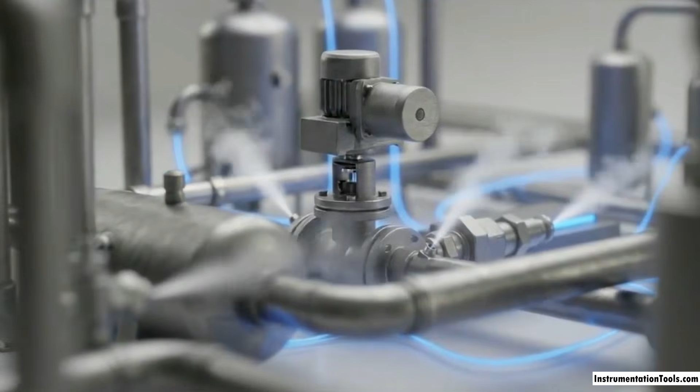Imagine walking into a facility where thousands of gallons of boiling liquids and high-pressure steam are constantly surging through massive metal pipes. The physical danger of a modern continuous manufacturing plant is hard to overstate. An unexpected shutdown at this scale drains millions of dollars in a single afternoon and triggers immediate, high-stakes safety protocols.

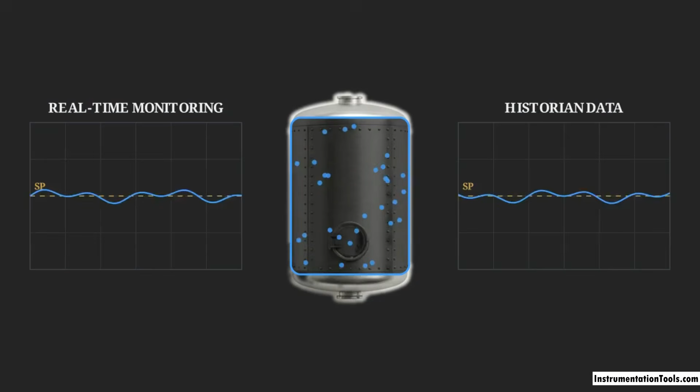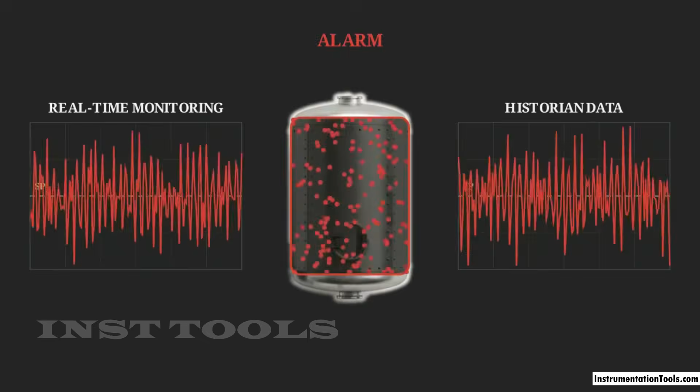So how exactly does a plant manage thousands of highly volatile chemical reactions and pressure changes at the exact same time, 24 hours a day, without making a single mistake? You might assume the answer is one incredibly powerful computer, but managing this level of physical risk requires an infallible organizational structure.

Decades ago, facilities relied on centralized control. Every single pipe, valve, and sensor on the factory floor was wired back to one rigid central location. This setup creates a single point of failure. If that one central brain loses power or glitches, the entire facility goes blind, and the whole plant has to shut down immediately.

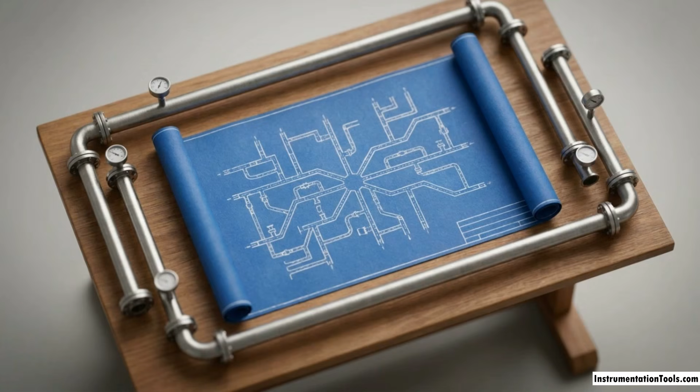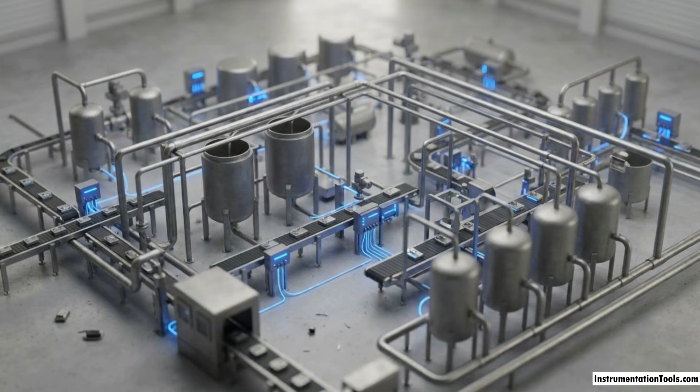To solve this, engineers developed the Distributed Control System, or DCS, which re-architects how the factory processes information. Instead of a one-man band trying to play every single instrument at once, a DCS operates like a symphony orchestra. Responsibilities are divided up among distinct, specialized sections working in unison. By distributing the brain power out across the factory floor, we eliminate those catastrophic single points of failure.

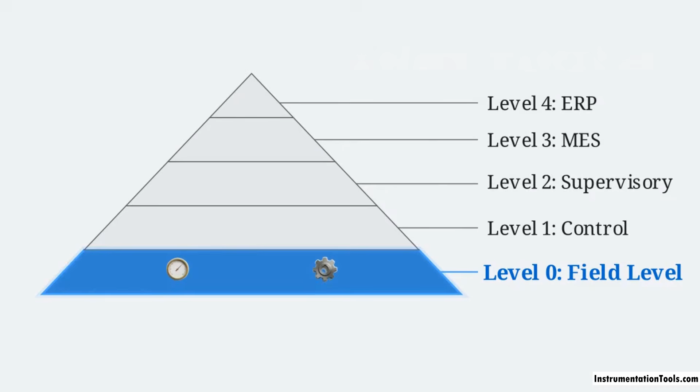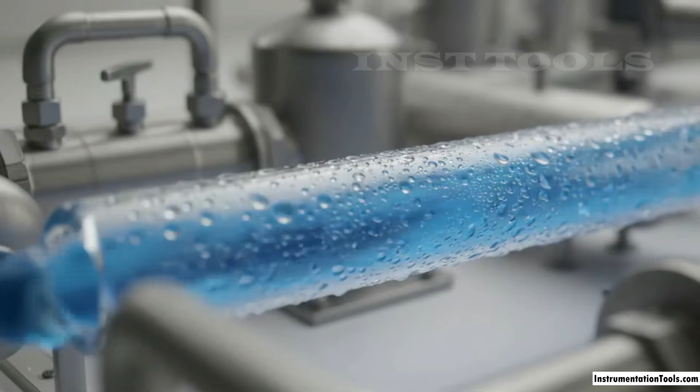Let's look at how this orchestra is arranged, starting from the ground up. The bottom layer of the DCS pyramid is known as level 0, or the field level. This is the only layer that directly touches the physical process of manufacturing. Down here, we have our sensors. These are the eyes and ears of the plant, constantly measuring real-world variables like the temperature of a liquid, the pressure inside a tank, or the rate of fluid flowing through a pipe.

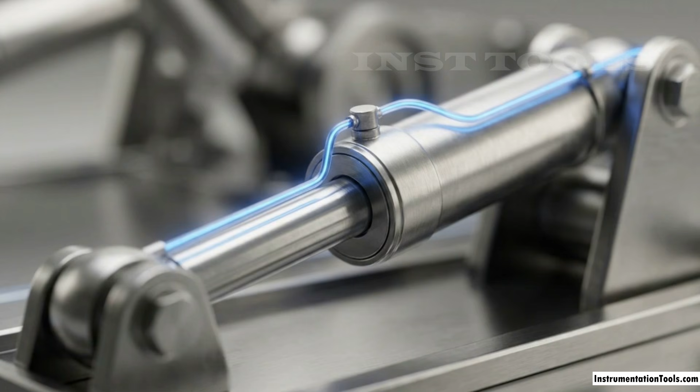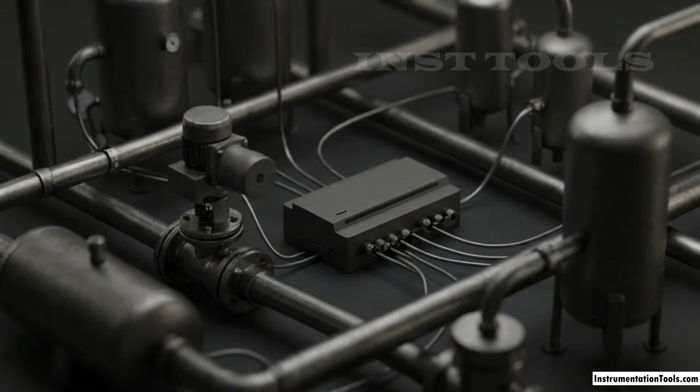Alongside the sensors are the actuators. Think of these as the muscles of the operation. They do the heavy lifting, physically opening valves, turning on pumps, or spinning massive electrical motors. In our orchestra, these sensors and actuators are the instruments themselves. They are the tools out on the floor actually making the noise. Without level 0, the rest of the control system is completely paralyzed. It has no way to perceive what is happening in the factory and no way to physically alter it.

Moving one step up, we reach level 1, the control level. This is where the actual thinking and automated decision-making take place. The plant floor is divided into discrete zones. Each area gets its own dedicated controller, acting as a section leader.

This introduces a critical safety feature, redundancy. If a controller fails, a backup immediately takes over, keeping the process running. By localizing control and giving every section a backup brain, we guarantee that a localized glitch stays local. It never cascades into a plant-wide meltdown.

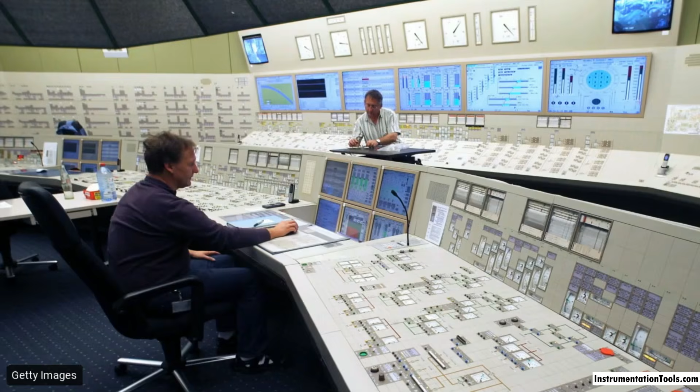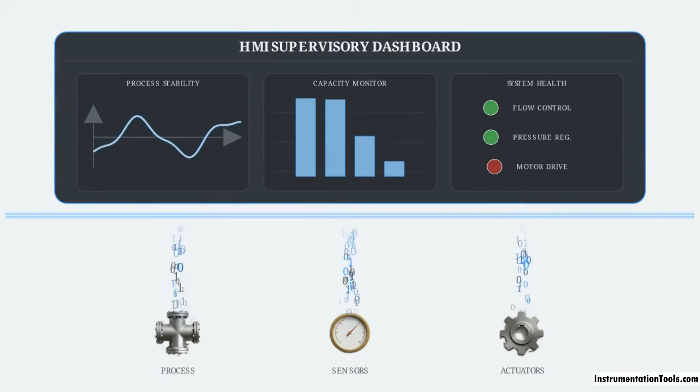Above the automated controllers sits level 2, the supervisory level. Here, human operators monitor the entire synchronized operation from a safe, quiet distance. They interact with the system through a human-machine interface, or HMI. This glowing digital dashboard takes the raw data surging up from the field and translates it into clear, visual information.

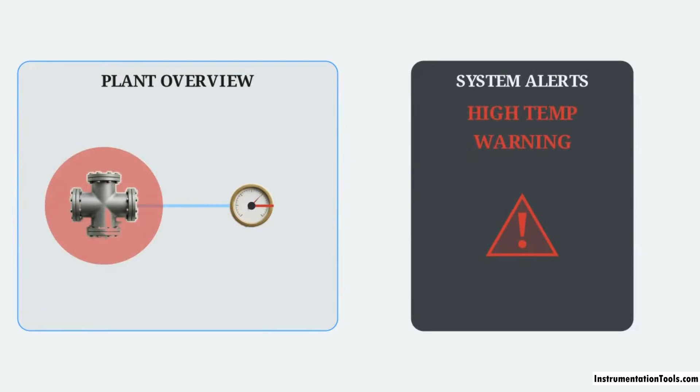The human operator acts as the conductor of our orchestra. They aren't out on the floor manually turning valves. Instead, they guide the overall tempo and harmony of the plant. The HMI allows them to receive instant alarms if a pipe gets too hot, optimize production workflows, and make strategic decisions based on real-time data.

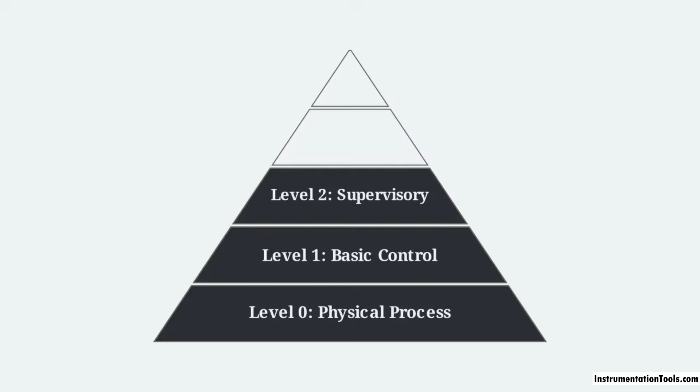Level 2 elevates human workers from doing dangerous manual labor near boiling chemicals, allowing them to execute big-picture management to keep the facility safe. Finally, the system caps off with levels 3 and 4 at the very top, manufacturing execution and enterprise resource planning.

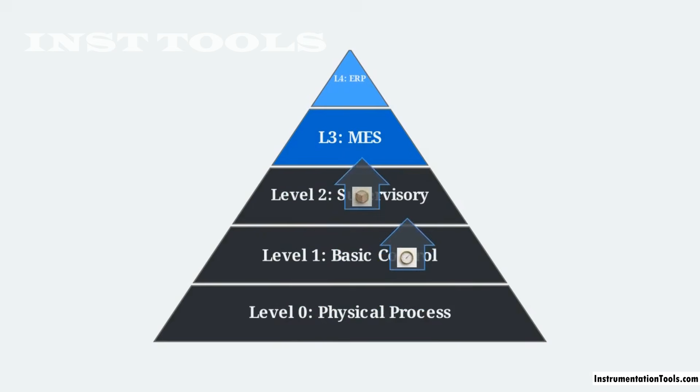These top levels don't control machinery. Instead, they process raw factory data to manage production schedules, supply chains, and plant finances. If the operator is the conductor, these upper levels are the theater management. They sell the tickets, balance the budget, and plan the orchestra's touring schedule for the year.

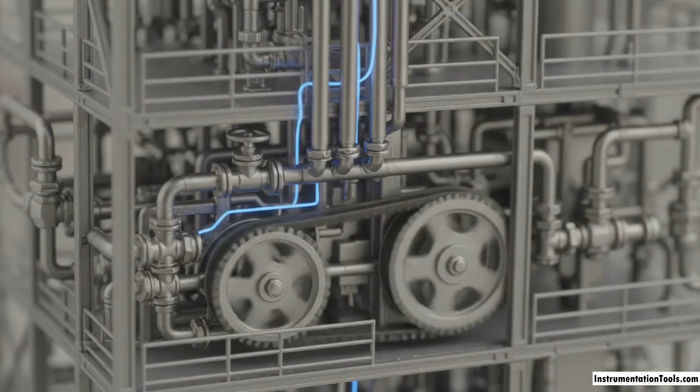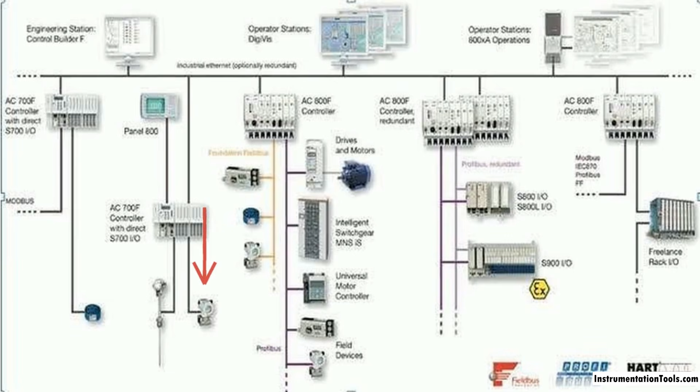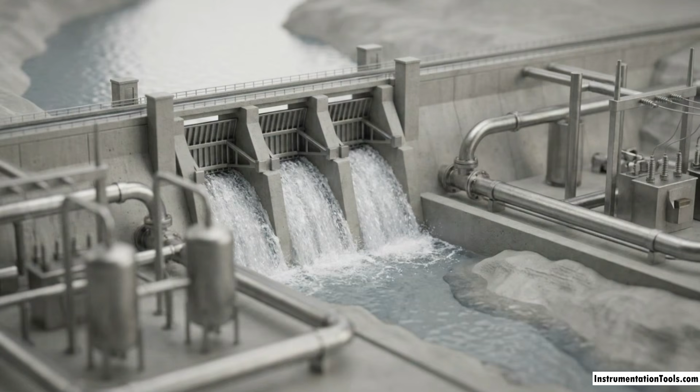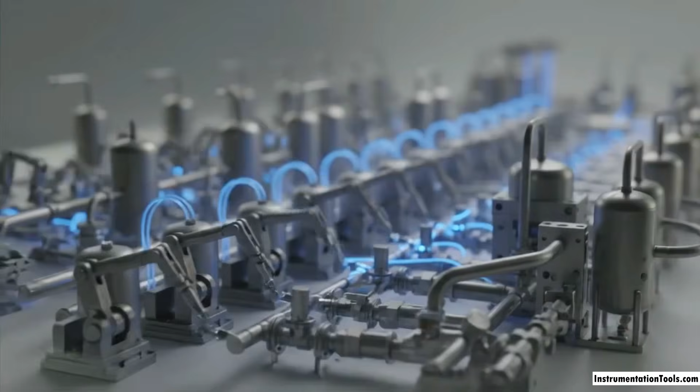This distributed architecture is the exact reason our modern society can safely refine oil, treat city drinking water, and generate electricity 24 hours a day. The continuous, flawless performance of our infrastructure depends entirely on this unseen digital teamwork. By dividing the labor and layering in automated backups, the DCS allows thousands of volatile components to work together with the reliable precision of a synchronized orchestra.